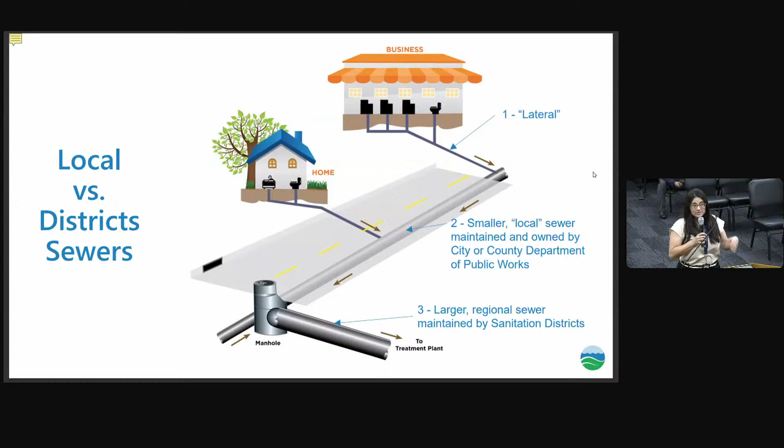Next slide, let's get into sewers. There's a little bit to know here. Most homeowners and businesses own the laterals. Then there are smaller local city sewers maintained by public works or the city. And then we are in charge of the large regional sewers, the big sewers. Our sewers are pretty big because we handle the flow for large volumes from multiple cities.

No, it's not supposed to do that. Let's see... oh, there we go.

When we talk about how the water is reused, groundwater recharge is our largest use, about 60% of it. There's also landscape irrigation. If you've seen those purple signs at parks or golf courses that say recycled water, do not drink, it's probably our water if it's local. We also have industrial users, people who use the water for their manufacturing process, and up in the Lancaster and Palmdale area we have farming operations for cattle, and also environmental uses up north. That's our wastewater story.

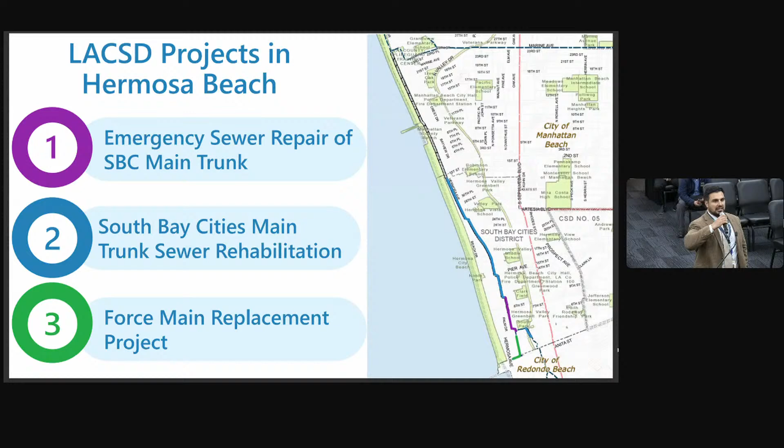Good evening, council members. My name is Abbas Ismail. I'm a project manager and resident engineer for LA County Sanitation Districts. I started with the district last year, but I've been working in construction management for the past 10 years. My projects span from aviation, working at LAX on Tom Bradley Terminal and Bradley West, to high-rise construction and K through 12 and higher ed.

Our work currently started with the emergency point repair on 4th and Bayview, which Joe had mentioned. It was night work performed in mid-December, caused by a collapsed pipe due to our sewer line being eroded. The erosion is caused by sulfur gases - usually the top crown of the sewer line corrodes because as water comes up, the gases erode the concrete or clay sewer lines, requiring rehabilitation.

That point repair opened us up to run further CCTV cameras along our sewer line on Bayview, and we found further deterioration in the reach starting from 4th and Bayview all the way through 8th. Therefore, we made the decision to go ahead and line that reach between 4th and 8th to prevent another collapse, because once the sewer line collapses, it erodes the soil underneath the asphalt.

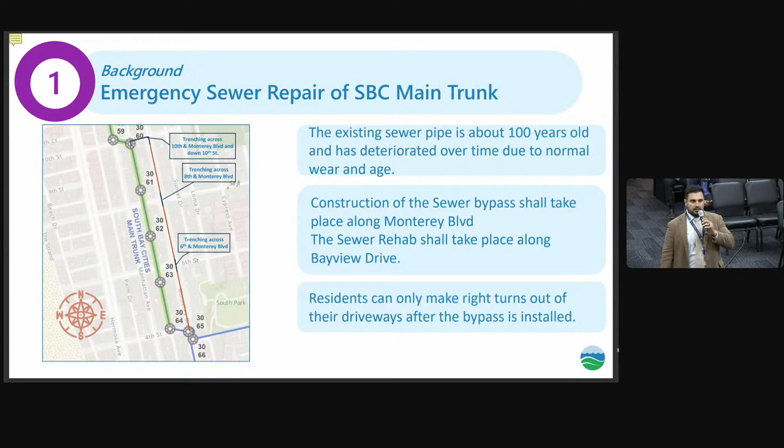Now, the expected construction impacts for the project: access - we're maintaining sidewalks to all the residents, and we're not affecting their driveway entrances. For example, this past week I was out there with my inspector. While we're doing our saw cutting and trenching, we're allowing residents to drive in along Monterey to get into their homes. So we're minimizing the impacts and only affecting parking from 7:30 in the morning until 4:30 p.m.

For example, on Tuesday we had a car parked along 10th Street. I'm the type of person who doesn't want to tow a vehicle - we're already affecting residents, so we knocked on doors, couldn't find the owner, but we called the city inspector. She was able to coordinate with parking enforcement, notified the owner, and we were able to get it moved.

So we don't want to tow any vehicles. We're there just to get our work done and cooperate the most with your residents.

In regards to personnel, myself and my inspectors knocked on doors the week before and handed out flyers to all the residents along Monterey Boulevard and Bayview. We went 1 block past 4th, then worked our way down 10th between 10th and one block past 10th Street to 11th, just to talk to neighbors, tell them about the impact and how it's going to affect them, and answer any questions.

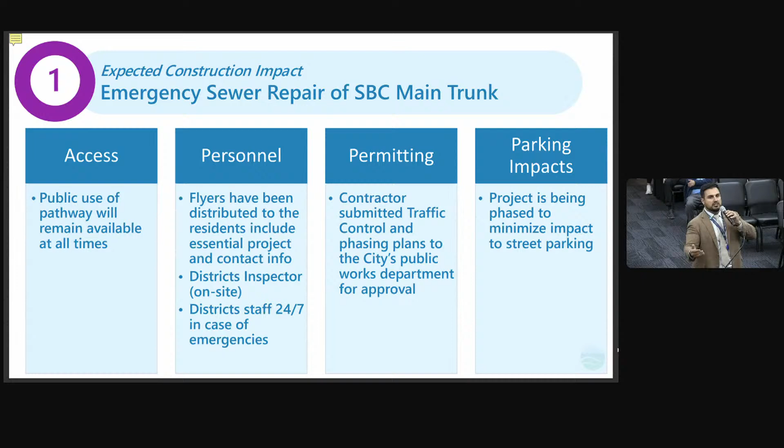Parking impacts - as I stated, I'll show illustrations on how we're shifting the bypass along the middle of the street to maximize parking. What I noticed when looking at the traffic control plan is it shows the driveways, and where there's more driveway entrance, this means less parking. So we came up with a solution where we allow parking on one side and take away parking on the other, wherever there are fewer parking spots, and that will remain throughout the duration of the bypass. Then once we're done with lining, that will allow us to demobilize.

If I go to the next slide, please.

In regards to the timeline: December is when we inspected our sewer lines and found the collapsed sewer. We did the point repair overnight, and then that started the permitting process in regards to coordinating with the Public Works Department for approving our lining work as well as the bypass.

We included the lining, as I stated, because we don't want another collapse. Based on our CCTV cams, we found that a lot of that concrete reinforced pipe has rebar sticking out - it's really deteriorated.

So in order to protect all of our citizens in Hermosa Beach for safety, we want to line it now, prior to the next project that comes up in 2026. That's going to line all of the reaches.

So we mobilized on this past Monday. We saw cut it on Tuesday. Today we're trenching on 6th and Monterey. We're going to continue trenching tomorrow into Friday, and then it depends how well it goes on Friday. We'll probably be out there on Saturday as well. But the trenching is in order to get the pipe underground at the intersections.

And I have pictures showing what a bypass is, how a truck looks like over the manhole. So it's going to make a lot more sense once I have that on the screen.

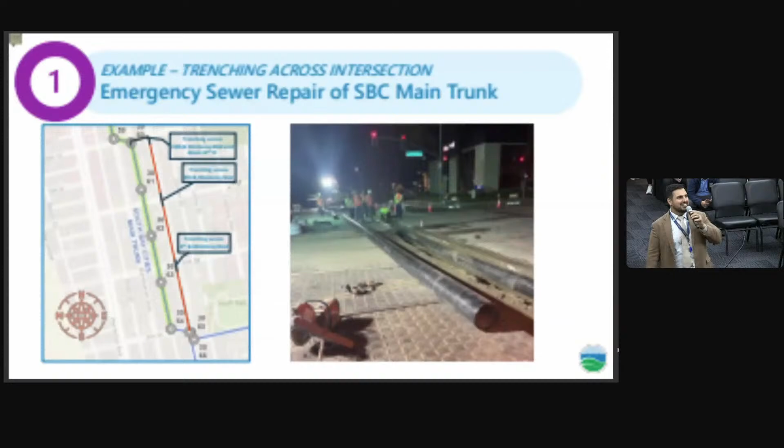Alrighty, so here are some examples that I've included in the presentation. As you can see here, this is exactly how it's going to look like. We got 2 8-inch HDPE, which is high density polyethylene. This is some tough pipe.

In La Puente, we actually had a box truck run over it, and I'm happy to say that nothing happened to the pipe. There was more damage to the box truck itself rather than our pipeline. So I can assure you that this is some really tough material.

It's going to go underground at the intersections, as I noted in blue: 6th and Monterey, 8th and Monterey, and 10th and Monterey. We're going to go underground starting from 10th and then go down 10th Street and then discharge into manhole number 3060. So we're going to first set up our discharge pipes, our bypass lines, first along Monterey.

And then the last thing is going to be the pumps. The pumps are diesel powered, but they're enclosed, so you have about 60 to 70 decibels of noise, which is like a constant hum. And then they're monitored 24 hours. So they're powered by diesel, but we're going to have crew out here 24 hours refilling with the diesel as well, if anyone's short of fuel.

And ensuring that there's no overflow upstream coming from Hondo. The reason why we're doing 2 pipes is that we always have a primary and a secondary, because when the Hondo pumping plant kicks on, I've looked down the manhole and the flow does increase significantly. So, we're close to the beach, we want to make sure that we're addressing all the risk, being as risk averse as possible.

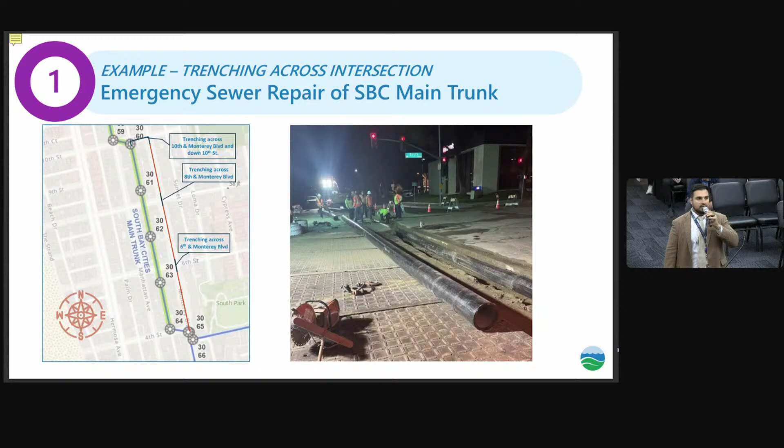Alrighty, so once we've trenched across the intersections, when we place the pipe in the ground, that's when we backfill and then put trench plates over the pipe across the intersections. So now we've dug it out. Like today we're digging, and then next week we're going to come in, pull those trench plates, put the pipe in the ground. And like I mentioned before, we're going to work in phases, block by block, to minimize the impact to the residents.

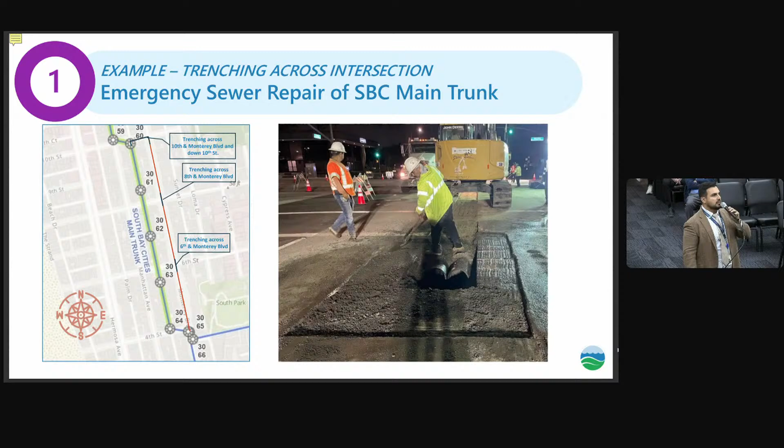Next slide. Alrighty, so this is exactly how it's going to look like. It's 2 pipes running side by side to each other, delineated with cones, and it's going to run in the center of the street.

And like I said, we're going to offset it between 4th and 6th towards the east because there's more parking on the west side. And then once we get to 6th and 8th, we're going to offset it to the west because there's more parking on the east side. And then again, from 8th and 10th, we're going to offset it close to the west side to allow for parking on the east side.

And what we've actually also accounted for is we're going to go 12 feet wide for the drive lane, plus an extra about 4 to 5 feet for cars to be able to safely turn out of their driveways as cars are passing by.

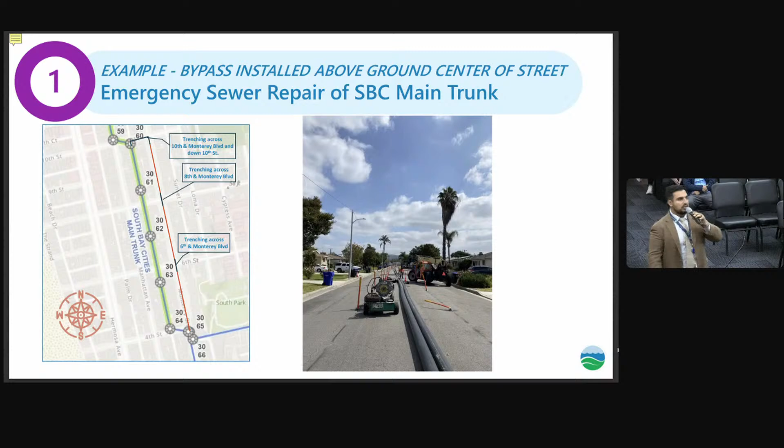So we're doing our best to take care of the residents of Hermosa Beach as best as possible to keep everybody safe. If we can go to the next slide.

Here's an example of the box truck I mentioned. Once we have the bypass installed, we're discharging to the downstream manhole number 3060. That's the easiest part of the job. We'll have one box truck over the manhole per day, and it's only going to be there for 3 or 4 hours. But we're going to be pumping out hot water to cure the liner. We'll be starting on February 3rd with the lining, and we'll be done by the 7th.

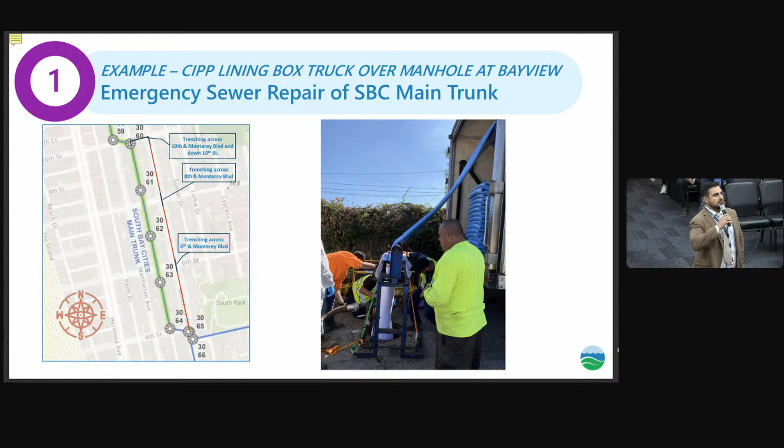Next slide. Like I mentioned earlier, we're phasing it out. We're working Monday, Tuesday. Today we were also on 6th Street trenching, and tomorrow we're going to be working over at 8th and 10th. Then Friday, possibly into Saturday, we'll be trenching across 10th and down 10th Street, to discharge into the manhole at the corner of Bayview and 10th. I talked to the resident in the corner where the manhole is - he's cool with it, he's a really chill guy. We explained to him the process, what's going to happen, how it's going to affect him.

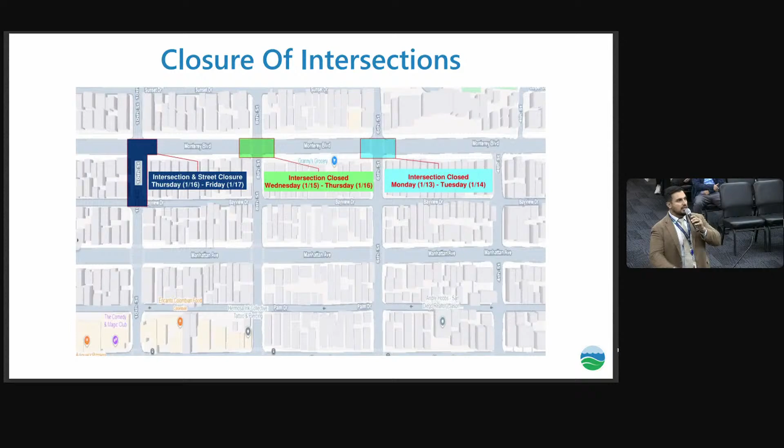So we're doing our best to over-communicate, just to make sure there's no surprises for anybody. Can you go to the next slide?

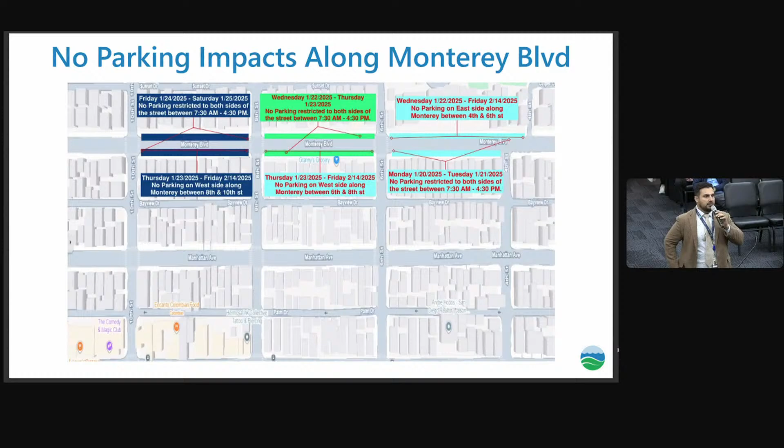Once the trenching is complete, next week is when our bypass contractor is going to mobilize. Like I said, we're going to work block by block. Once we complete one block, we'll flip over to between 6th and 8th, and then finally work on the block after. These two slides, this one and the one before, I attached to the flyer we handed out to residents. It illustrates when parking will be taken away, from what time to what time, and we'll be posting no parking signs 72 hours prior to moving into the area so residents are aware of the restrictions. Can I get the next slide?

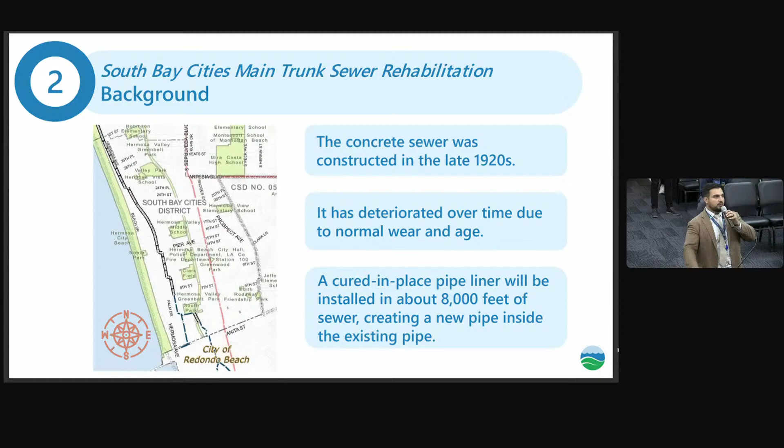So that's the emergency project, happening between now and February 14th. This is part of a larger project planning to start in 2026. Like I said before, we're trying to mitigate the possibility of another sinkhole or collapse due to the deteriorating pipe. So I'm going to pass it on to Mr. Artin - he's going to tell us all about the project that's coming up.

All right, thank you, Artin. All right, thank you, Abbas. Thank you, commissioners, it's a pleasure to be here to provide an update.

So this next project is - oh, is that better? This next project is similar to the previous one, essentially more of the same. Everything you saw there - the bypass lines, the trenching, the partial parking restrictions - all of that still applies here. The map on your screen shows all of Hermosa Beach, and our sewer actually spans the whole city, north to south. Toward the upper end of that picture is your border with Manhattan Beach, and the sewer line you can see snaking down south, continuing into Redondo Beach.

Between the previous project and this one, we'll be rehabilitating almost that entire length. The previous project is about 1,000 feet of sewer, and this project is about 8,000 feet. Once we're through, your sewer through all of Hermosa Beach will be practically brand new. As Abbas mentioned, it's about a 100-year-old sewer, constructed in the 1920s. It's a concrete sewer that's deteriorated over time like any concrete would if it was that old. The way we rehabilitate it is with a cured-in-place pipe liner, essentially creating a new pipe inside of the existing pipe.

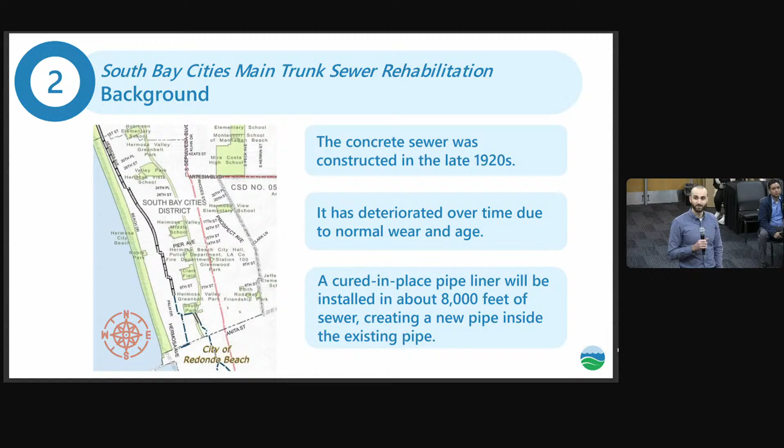Next slide, please. A lot of similar impacts for this project. Traffic-wise, most of the work is along 4 streets: Hermosa Avenue, Palm Drive, Manhattan Avenue, and Bayview Drive. The work will be daytime, just like the current work going on. As you saw before, there are some limited lane closures - typically you close down one lane for construction equipment and have no parking next to it, giving room for traffic to drive through. There's some work on very narrow streets, specifically Palm Drive and Bayview Drive, where once construction is set up, there's not enough room for traffic through, so you'd most likely need a partial street closure just for that block where the work is taking place.

As far as personnel, we try to give a lot of notice to the residents. There's signs posted with contact information. Anytime there's actual construction going on, there's a district inspector from our agency who's there to oversee things, so they're one point of contact. During off hours when there's no work going on, there's still a 24/7 phone number where residents or anybody can call and get in touch with us.

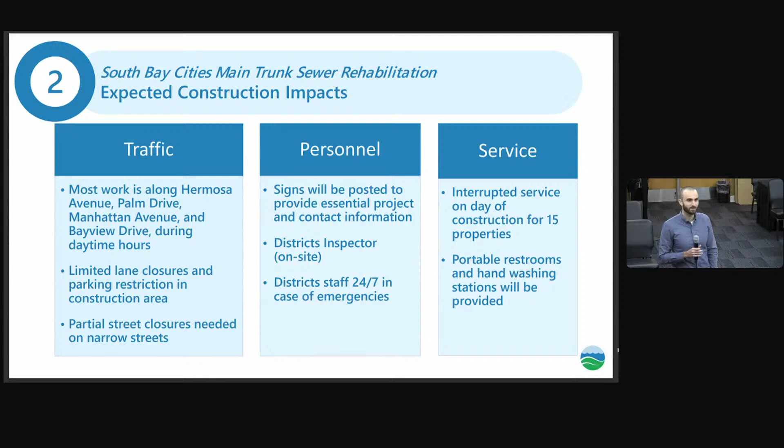As far as interruptions to service, along that 8,000 feet of sewer that I mentioned, there are a total of 15 or so properties that are directly connected. For those properties, on the day of work, they will not have service, meaning they can't use their drains.

So for part of a day, there's an interruption in service. For those properties, what we do is provide portable restrooms and hand washing stations, so they still have that available. Next slide, please. This is a rough timeline. We're talking about work that's about a year away, so it's hard to be extremely precise, but we're finishing up the design of the project. In August or so, we will select a contractor to do the work. They'll get their plans together early next year, February or so. We think the actual physical construction will begin, and then it's about 3 months of work, meaning we finish in May, roughly. Keep in mind the 3 months is not all 8,000 feet every day for 3 months. It goes section by section, so the impacts are really a small area, and then that kind of moves down along the sewer.

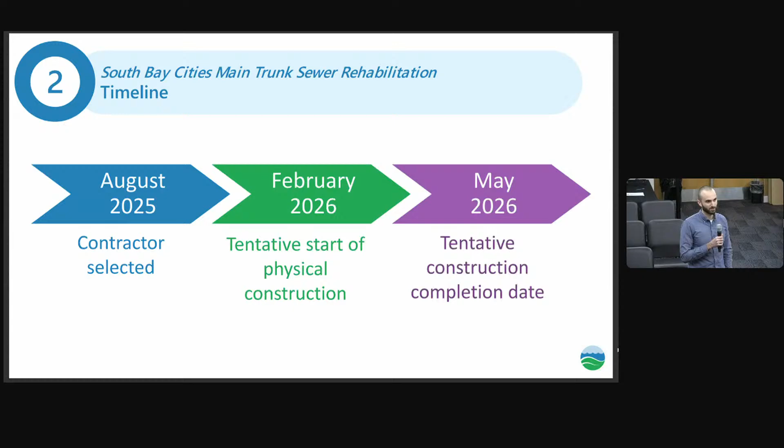Next slide, please. Okay, so that was a brief overview of that project. We'll be shifting gears a little bit to a different type of work that my coworker Leo will fill you in on.

Thank you, Artin. Hello, commissioners. My name is Leo Juarez. I am a civil engineer in the design section and sewer design section at the sanitation districts. Like Artin mentioned, this is a different type of project. This is not a CIPP project. This is a force main replacement project.

Just a little history on Herondo pumping plant, which is shown on the left there at the bottom on Herondo Street. It's actually located in the city of Redondo Beach. It was built in 1970, and it was built with one force main at the time. In about 1991, they built a secondary force main because the original force main was failing. Now, since 1991, the original force main has been out of service this whole time, so this particular pumping plant is only operating with one force main. And at the districts and in general, the standard practice is to have redundancy at a pumping plant, so we want to build that second force main.

Luckily, we have an existing alignment from the original force main, so we're going to remove that old force main and replace it with a brand new HDPE force main, as it's a really powerful, really strong pipe that'll last a really long time. All of this work, as it relates to the city of Hermosa Beach, is within the public right-of-way along Monterey Boulevard, going north and south. The alignment is on the west side of the road.

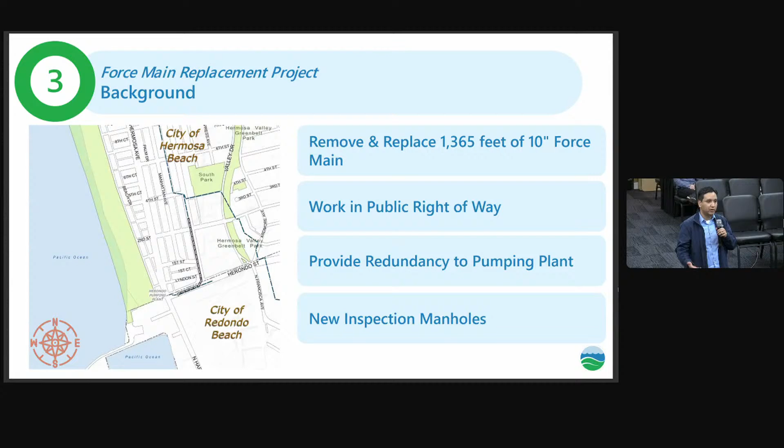It also includes new inspection manholes. There's going to be one located within the alignment in Hermosa Beach, and one in the city of Redondo Beach. We are going to rehabilitate a couple of our manholes, what we call a breakover manhole. Essentially, what a breakover manhole is, just a regular manhole. It's where the force main ends.

Typically, as you know, sewers are gravity-based. It flows from a high point to a low point, and that's how sewers are generally designed and built. A force main, essentially, is a pressurized sewer. It acts like a water main, but for sewage, and that's the main difference here. So a breakover manhole is a point where it transitions from pressure to gravity, so that it can drain to one of our treatment facilities. Next slide, please.

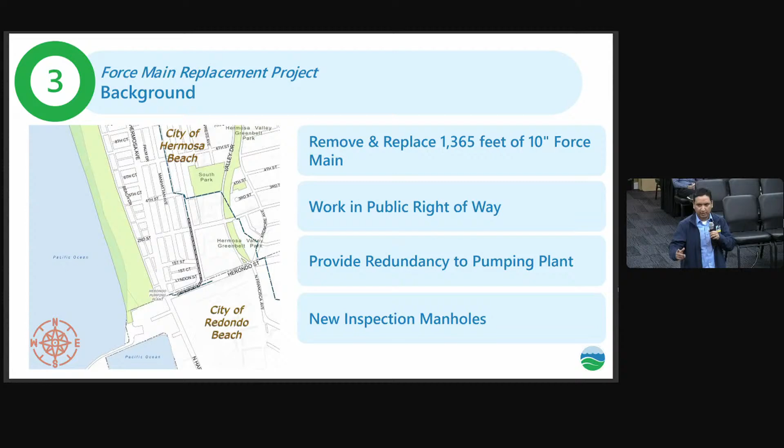So what are the expected construction impacts? This type of project is all open trench. The whole 1,300 linear feet will need to be excavated and trenched and opened up.

Traffic will be impacted on Monterey Boulevard and Herondo Street, but work is only going to be during daytime hours. There is opportunity to use plates for after hours if necessary, and that could be figured out when the contractor submits for permits and the city gets a chance to review all the documents.

There will be limited side street closures. As Abbas mentioned on some of his slides, we have to trench across a couple of intersections, and in order to do that, we will likely have limited side street closures. But again, we can plate afterwards for after hours to allow traffic to flow.

There will be parking restrictions in the construction zones. This particular project is going to be built in pieces or phases, not the entire 1,300 linear feet. I suspect they could close off a small construction zone of up to 100 feet at a time or less, and work their way down or up as they're building the force main.

The force main is going to be the first thing they do on this project. There are other components related to the pumping plant, but those are in the city of Redondo Beach. The personnel is similar to what Artin described.

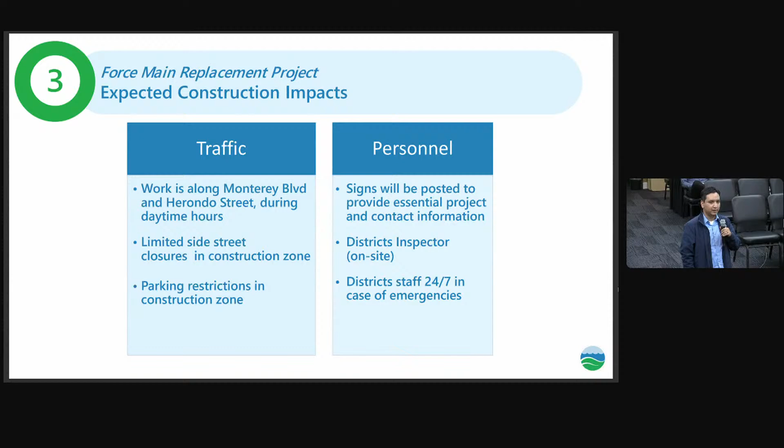Next slide, please. Let's talk about the timeline or schedule. This project has been in design a couple of years. We have a consultant working on it, and the district is managing the consultant's work. Award of contract is set to occur next week for a contractor to start the work, and the tentative start of physical construction is scheduled for April of this year, with a completion time of January of next year.

And that concludes my part of the presentation. You guys have any questions? We're here.

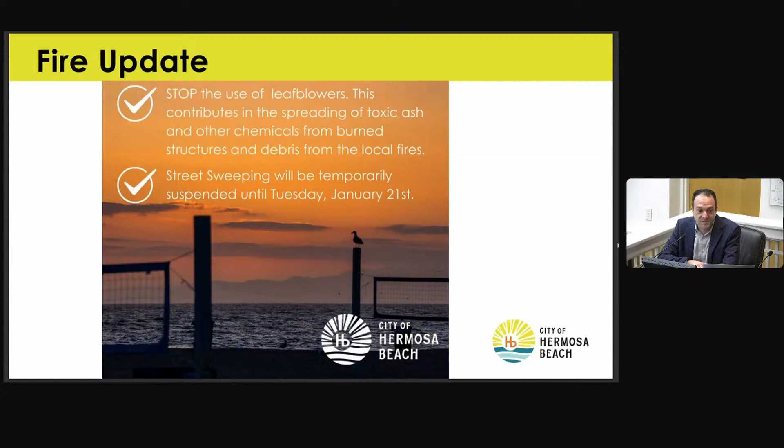Hopefully by then the fires are calming down and we're seeing less ash falling in the city. I think it has definitely decelerated from what we were seeing last Wednesday and Thursday in town. Next.

I briefly touched on the Cal Water water main installation work. As we noted, we are working very closely with both the Sanitation District and Cal Water on this. The water main itself has all been installed on Bayview Drive from 2nd to 8th, and they're currently working their way north from the southern limits on all the service connections.

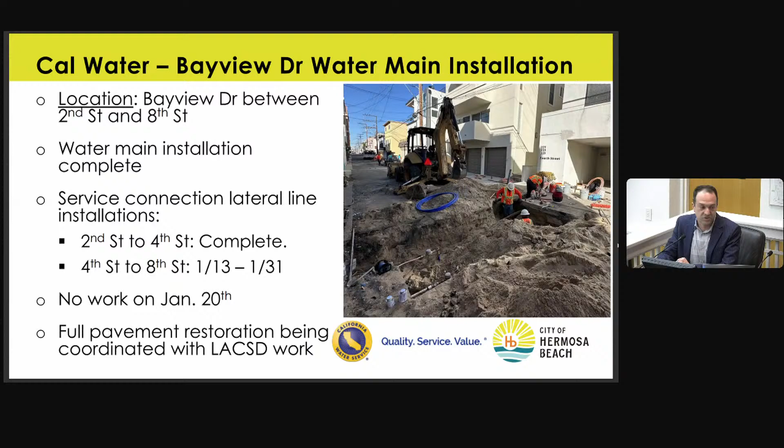They've completed all the testing of the line. It's really just service connections now from 4th to 8th Street. Their work will be halted on Monday to observe the MLK holiday, and then, like I said, we're working on coordinating the final restoration. There's a possibility they might do some restoration between 2nd and 4th Street, which is south of the Sanitation District's project limits, but we're still working those details out with them. It's likely all to follow once the sewer project is complete. Next.

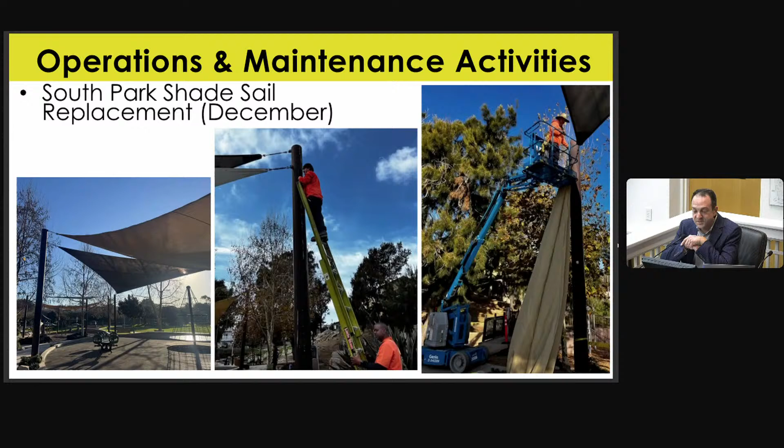Just some updates on the many activities our team has been busy with through the holidays, November and December. I want to highlight a couple things our O&M team has been doing: we replaced two of the South Park shade sails that had deteriorated. Our crews did that work in December. Next.

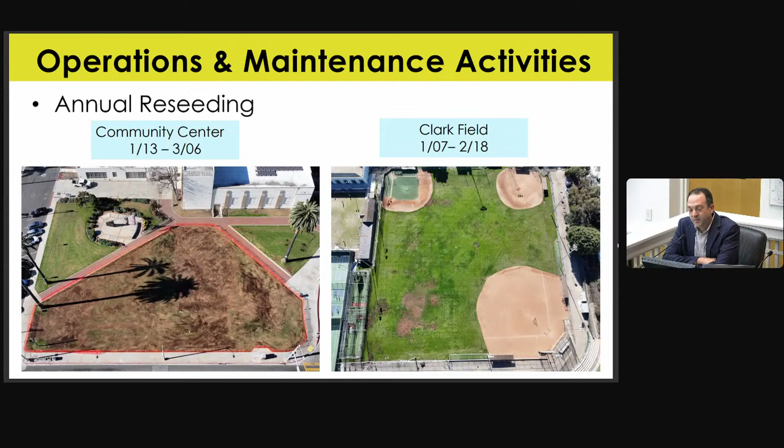We're currently working on annual reseeding efforts. You may have noticed the orange fencing out in front of the community center that was deployed—that will be in place through early March while we do our regular reseeding operations, since it gets active use and we have to do this on a regular basis. Clark Field is also receiving some reseeding, which will be completed mid-February in time for Little League season. Next.

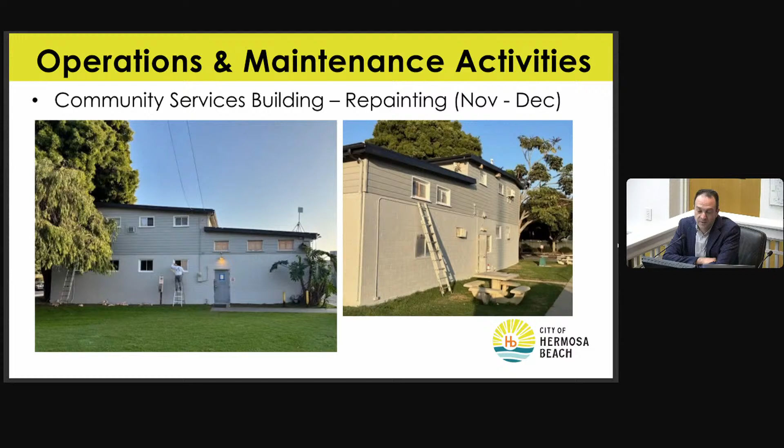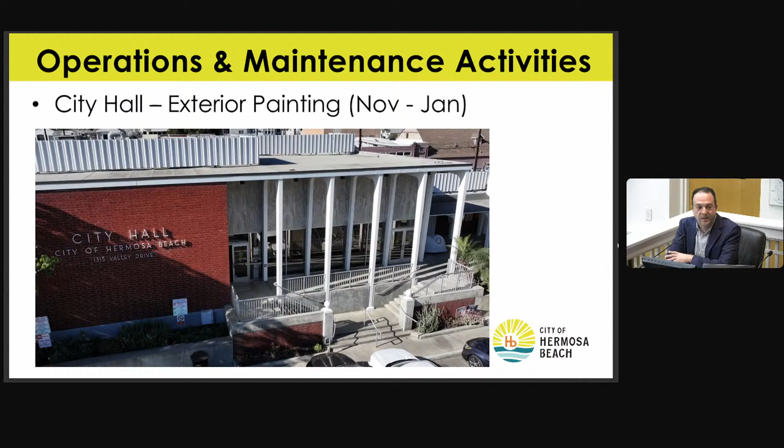I wanted to give an update on the Loma Drive trees at 10th Street. I believe it had come up in public comment. We had given a highlight that there were three trees in the parkway that were removed without permit or approval. This is back in August. There was discussion at City Council at that meeting following the removal. We have been in contact with the resident that did remove them, as well as the adjacent property owner. And the city purchased and installed the new trees, and the resident that removed them will be receiving a bill for its replacement.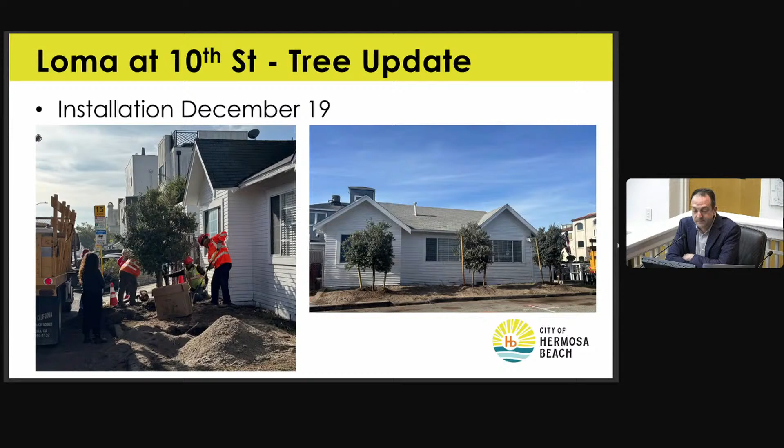I also want to highlight that same day, we also planted three more trees off of Loma. This is at the entrance to Clark Field. There were a couple large trees there that were very invasive. We had actual complaints from neighbors building their new home that they were seeing a lot of root intrusion into their foundation, and it was also tearing up city walkway, and it was close to an Edison vault transformer. So those were removed, and we've come back around now to replant that location and hopefully add some shade to that walkway in the future.

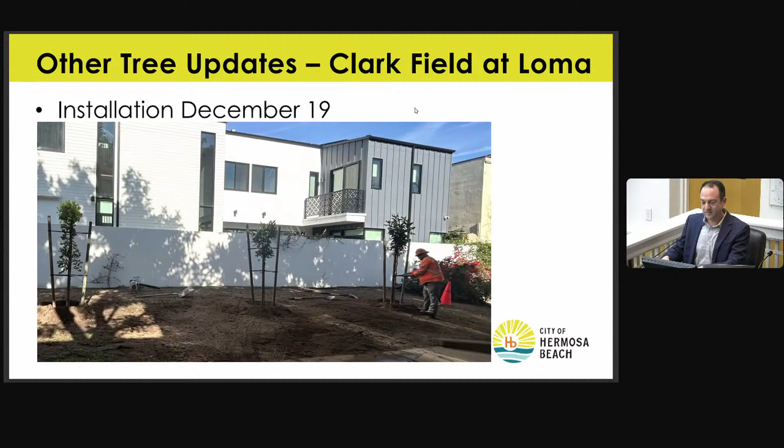And I think that's all I have in here for tonight. Happy to answer any questions on those items.

Any questions? Any questions or comments on the activity reports? All right, then I think we're moving on to the, oh, go ahead.

Sorry. I was happy to see that they were putting in the cameras. I think that's something that's important nowadays. I was happy to see that they are putting in cameras, and I thought that was important. I think that was the main thing that I saw in November. Lots of work.

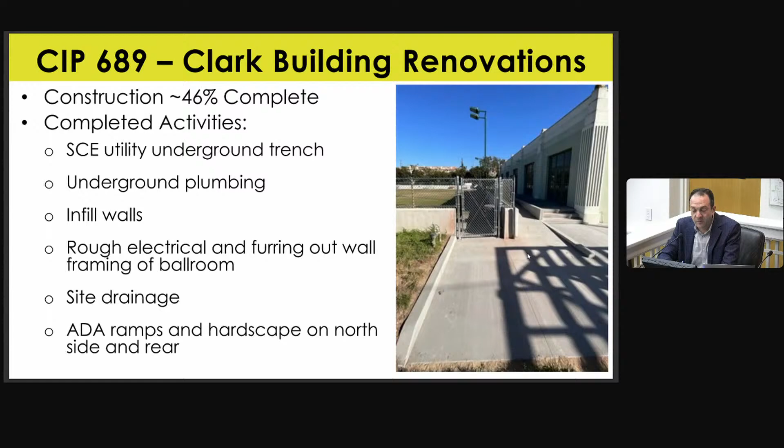Just some more pictures to highlight completed activities, some underground plumbing. The photo in the middle is the kitchen. If you saw the photo at the beginning of the project, there was no floor - you could see dirt in there. So we've got the plumbing in, and there is a floor now in the kitchen, which to me is a huge amount of progress for that room alone. We've completed all the interior framing, all the demolition, the framing, as well as all the furring out of the walls in the interior.

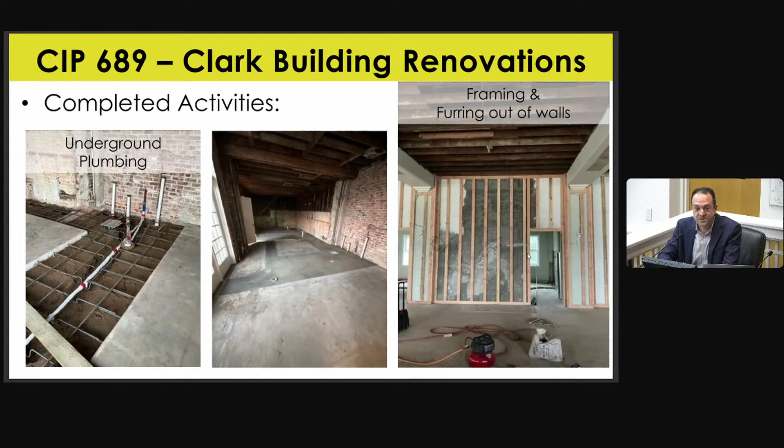There's a number of ongoing activities. They've shifted onto the HVAC and continuing on with the hardscape work that's now shifted towards the front of the project, as well as some of the retrofit and other interior work that's ongoing.

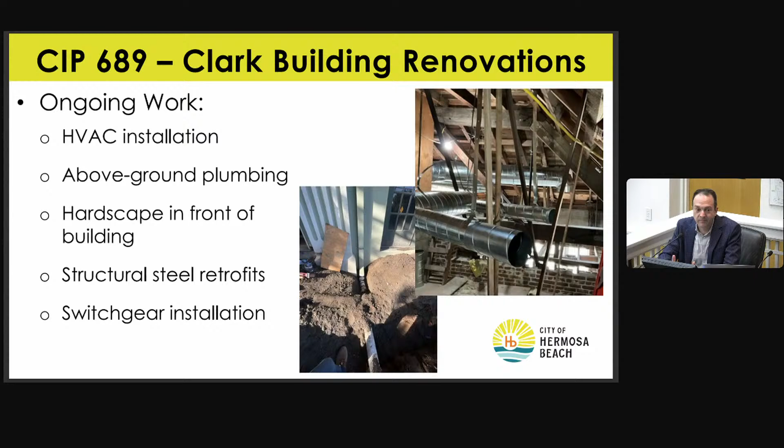We're actively working on our annual sewer improvement project, not the county one - this is on the city's lines. CIP 421 is a citywide project with a number of different components. We completed the initial CCTV inspection. There were access hole repairs and other point repairs through the city, and now they've moved into the next phase of doing sewer line replacement. The current area of work is on 10th, 11th, and 11th Place - these are full replacements adjacent to the existing sewer line, which would then be abandoned. That is ongoing, so they'll be at this location and then move to a different location in the city later on. We'll continue to notify residents as we get through each spot as the phases advance.

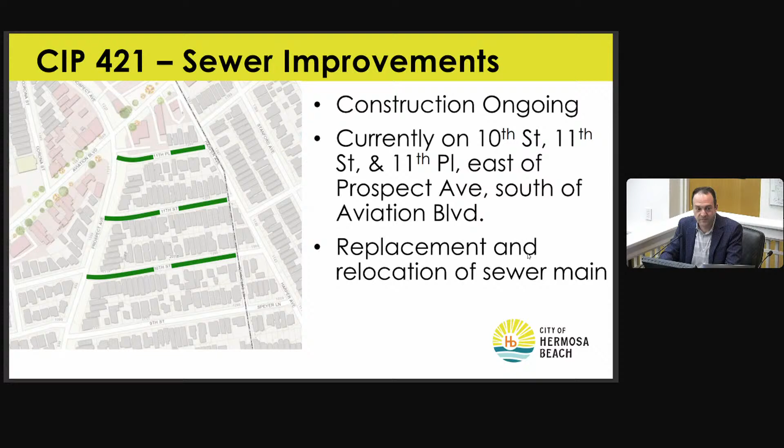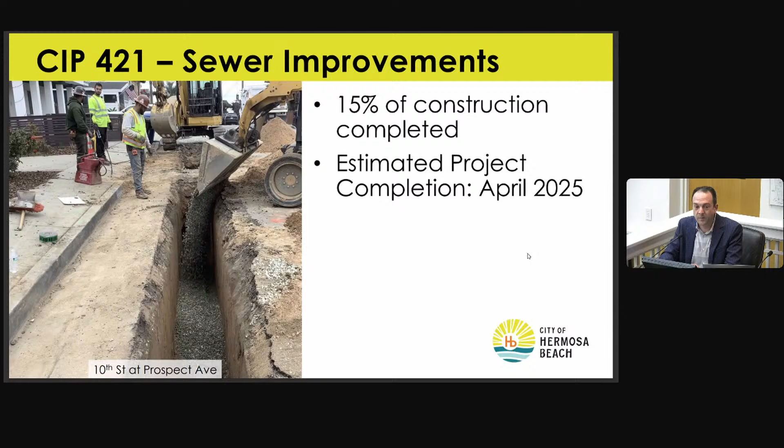We're about 15% complete on that project and still targeting tentatively about April or May for the project's completion.

Our Greenbelt pedestrian trail across the street from City Hall is advancing the ADA path on the Greenbelt from 8th Street to Pierre Avenue. Several weeks ago, we opened the first phase of the project to the general public to walk on the new decomposed granite, or DG, path. You can access the location from 8th Street up to about 11th Street. All the irrigation work was completed, the new gym equipment is in place, along with new trees and plantings, particularly near the 8th Street southern end. The crews are now focused on the northern half between 11th and Pierre Avenue. They've nearly completed installation of the DG material there, most of the gym equipment is set up on the north, and they still have landscape work to do. One of the final phases will be striping around the project, including updates to the crosswalk between the Greenbelt and Clark Building, and then concrete work for some of the ramps along the periphery, which will be one of the last components. We're looking at potential completion as soon as the end of the month or early February, but we're getting close.

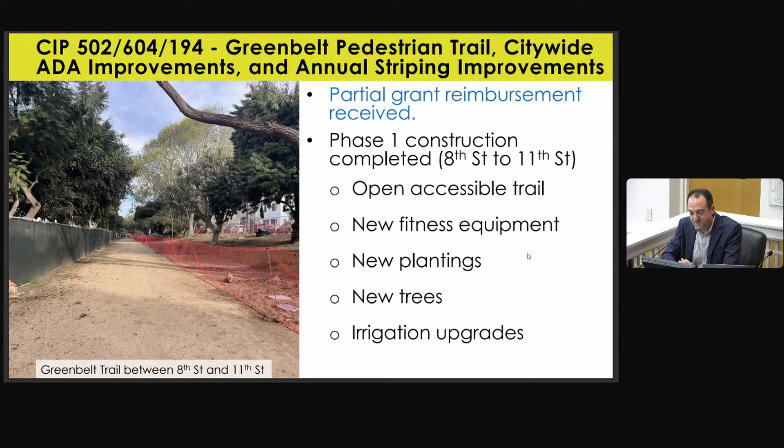This slide shows the schedule and what it's looking like on the northern half of the path as they lay down that base material, and the DG is actually installed. I think this was from earlier in the week or the end of last week, the photo that's shown.

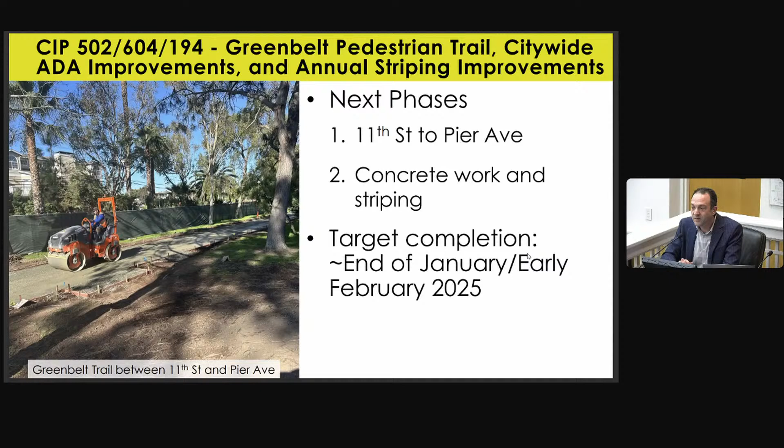CIP 624, I'm pleased to say that since our last Public Works Commission meeting, we started the project and finished it. This was a small project with a handful of curb ramps and sidewalk panels on Valley Drive, near City Hall, South Park, and a few select panels on Monterey. Most construction was completed during the Thanksgiving break when pedestrian activity was lower, since we were concerned about school children having a safe place to walk. Striping work was completed the following week or two. We're now in project closeout, and the project is substantially complete.

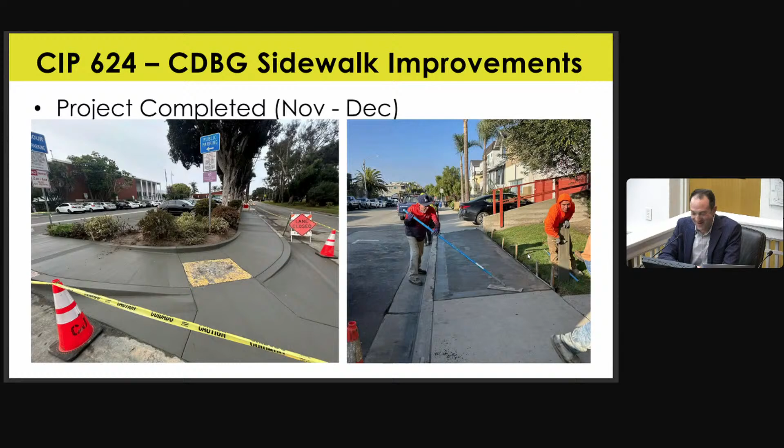I want to give an update on our sidewalk improvement project. We phased this project, with an early phase to address two locations of higher priority. We had a public hearing here at Public Works Commission several months ago about the removal of two trees on 24th Street near Palm Drive, which have created substantial uplift to the sidewalk and curb ramp. This project requires removal of those two trees to construct an accessible ramp to current standards and replace the panels. There's also a section of sidewalk needing replacement on 21st Street, just south of PCH, on the southern side, where we would reconstruct the sidewalk and expand it into the parkway for a wider sidewalk and improved parkway condition. Both are tentatively slated to start Tuesday, including the tree removal and concrete work.

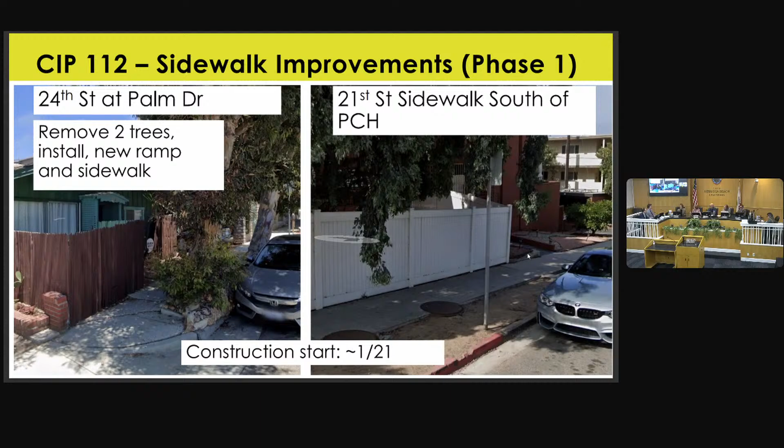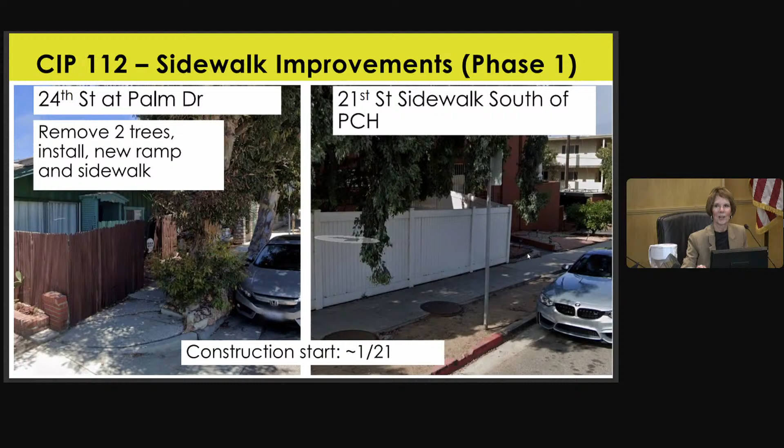If I could make a comment about 24th Street at Palm, the neighborhood thanks the Public Works Department. There'd been people who had fallen at that particular corner, and individuals who are ADA could never even go down there, so the neighborhood thanks you. It was an awful area. The city has also received a number of complaints, especially at 24th and Palm, so we're excited to finally get this done.

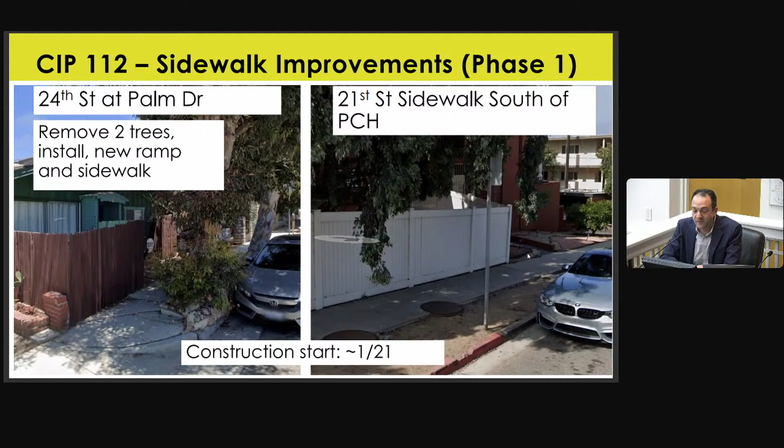If we go to the next slide - last evening at City Council, Council approved the award of a contract for our annual storm drain improvement. This is for Bard Street and Oak Street, addressing a significant amount of stormwater runoff that was going directly into the Marineland Mobile Home Park. This would add a catch basin, a new connection, and an access hole to the storm drain line at that corner to help catch rainwater and mitigate impacts to that adjacent residential neighborhood. That was awarded last night, and we're looking to start construction hopefully as soon as February, taking only about a month or two to complete.

Can I jump in on this one? I saw the presentation last night and read the staff report, and there were some things I liked about this in terms of budget. It was good to see we got a lot of bids, which hopefully bodes well for the future in terms of having companies that can support us and provide competition to help keep costs down. It also looks like, based on the bid we got, it was low enough that by my calculations we ought to be able to return some funds back to the storm drain fund. It looked like you budgeted just the right amount to cover the worst case, since there were some bids high enough that they could have pushed it to the limit if those were the only bids we'd gotten.

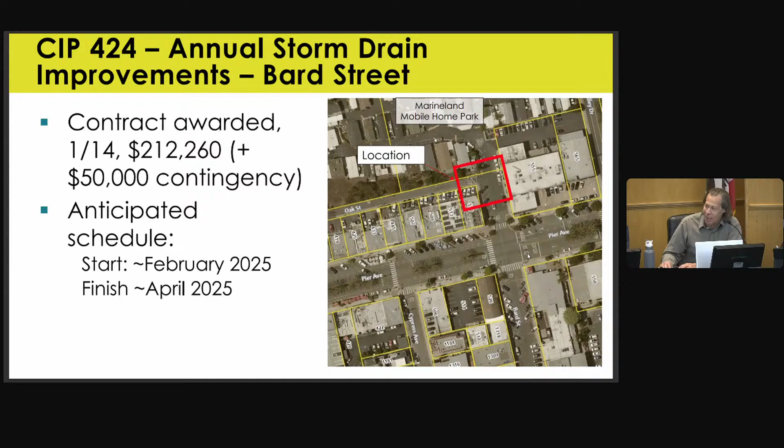Thank you. Yeah, we had about $440,000 budget in the CIP, so you're absolutely correct, Commissioner Grayson. We did try to have enough wiggle room in there. As we were designing it, there was some uncertainty in what the full scope would be and what kind of bids we would get with a small project. So you're absolutely correct, anything remaining would be sent back into the fund balance. We're definitely glad to see it come within cost.

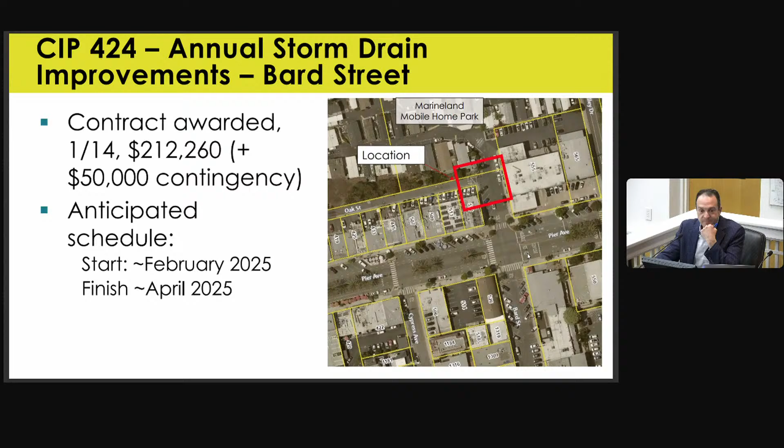So we're working to sequence that work as tight as we can. And as we get additional schedule information, we'll be working on much more outreach to the downtown about what the exact impacts are going to be as we start to nail down that schedule.

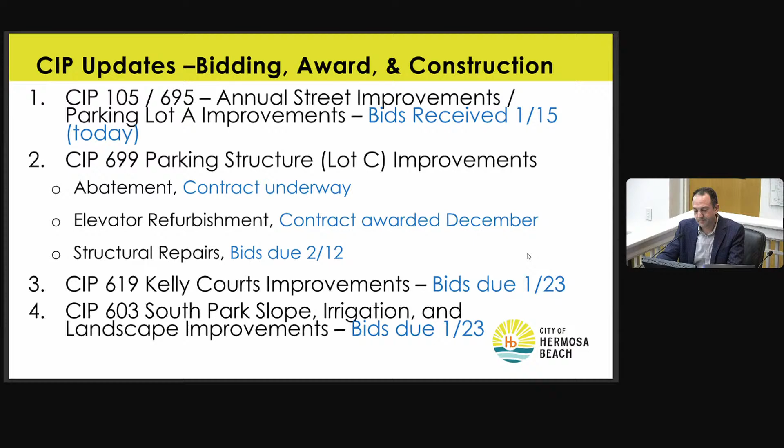Going on to the next slide. I had a couple of prepared comments on these projects, so would now be a good time for that? I have, I think, one more slide update, then we could go into that. Go ahead.

I want to give a few more project updates. Pier structural inspection is another big project that's coming. We've been working closely with our structural engineering team. They concluded all the visual observations in November and December, and went out in mid-December to do the underwater diving inspection.

So far, the diving inspection brought back good news, showing that most of the repairs we did to the piles or columns under the pier were very successful. We caught most of the issues on the piles, but we will need significant repairs to the deck itself. We always knew that would be the next project, since the first one we just completed was under the pier, and now we're moving on to the deck.

This involves both the deck panel above and below. We're sorting through the results, with additional testing underway with the structural engineering team to confirm results and verify the scope of work. We're also doing a cost-benefit analysis to determine which repairs should be expedited and which can wait. There's more information coming, but this will be a fairly costly repair in our near future to maintain the integrity of the pier.

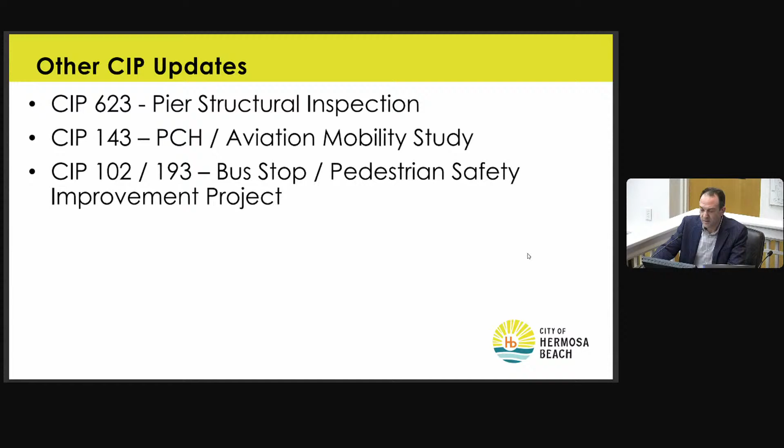We won't hear on either of these applications about competitiveness until April, with potential award or actual funding receipt by the end of 2025—likely fall, September, or even January the following year. These take time, but I wanted to give an update on our work to get funding and move these two or three projects forward. That's all I have for tonight, and I'm happy to answer any questions.

I need to excuse myself. I'm having some physical problems and don't think I can sit much longer, so I'm going to excuse myself.

Any comments or questions about the CIP report?

Yes, I'll work my way back in reverse order to what Joe talked about. You talked about your last two projects being traffic safety, pedestrian crossing safety, and you also made reference to the PCH mobility project, both of which involve working with the COG to get funding. I noticed, and I'm already familiar, that typically for PCH mobility we get Measure R or Measure M funds, and there's a process we have to go through.

The monthly report, when it talks about the pedestrian safety crossing project, refers to grant funds. So are those different funds from Measure M or Measure R, or is that the same exact process? Or do they facilitate us getting other types of grants from places besides Metro or Measure M or R funds?